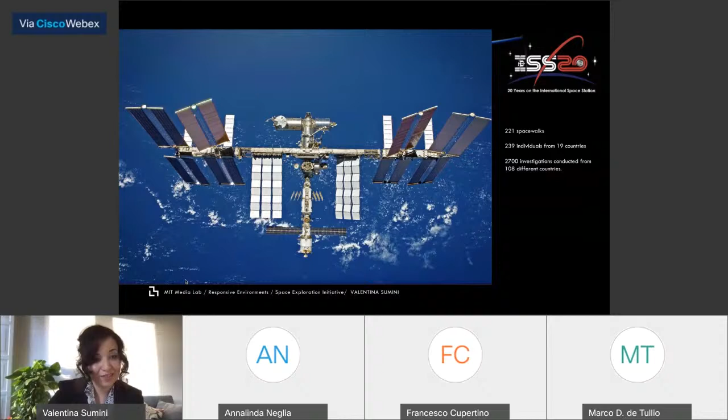When trying to give a new contribution to the space architecture world, we had to understand very carefully where we are coming from. We are coming from rigid and inflatable modules. We have extensive knowledge on how to design this sort of aluminum can-shaped component, which the International Space Station is made of.

We also had extensive research on all the inflatable structures that both NASA with the TransHab and Bigelow Aerospace are developing for outer space. The combination of the two creates a new possibility in how we can really define and experiment in this new type of architecture.

What I think is interesting about inflatables — for example, inflatable solutions that can be pressurized in situ, when they are really in orbit or on the Moon or Mars — is the idea that they can be compacted during the launch phase, and then deployed and pressurized once there.

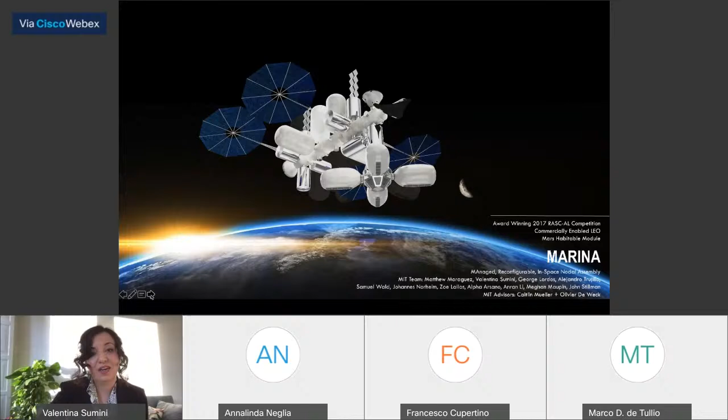With this concept, we designed our first project back in 2017. This was meant to be a space hotel designed using the existing modules of the International Space Station, with new modules added for allowing space tourists to go there.

What you can see here, with this sort of flower of inflatable modules, is the space hotel. It can host up to six tourists. What we tried to realize is inserting these hotel modules around the Cupola module of the International Space Station.

The idea was allowing the tourists to see Earth from above and creating that awareness experience I was talking about — the overview effect. This was one of the first projects that tried to combine the knowledge of both rigid and inflatable modules, using the library of modules already available at the time, in 2017.

But then we moved forward, trying to understand what could be an innovative solution for designing infrastructure on the Moon.

And looking at the lunar environment was something we wanted to take into account, or the use of in situ resources. There are several interesting aspects in using, for example, the lunar regolith for 3D printing to generate infrastructure components, but also another interesting aspect is ice.

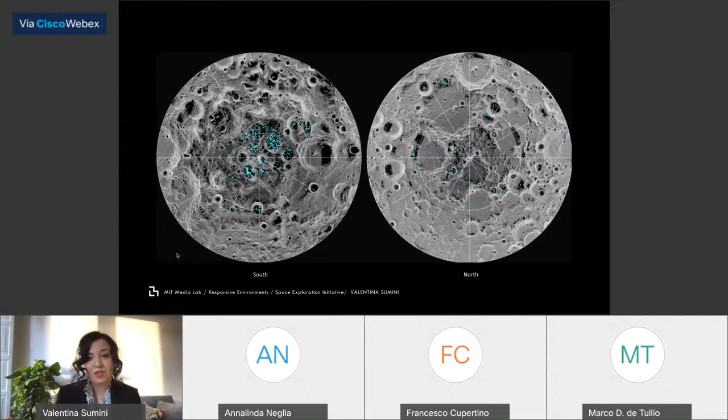We wanted to locate the habitat in a place plenty of ice, in this case the South Pole of the Moon. What you can see here are the two maps of the North Pole and South Pole. In the South Pole, we decided to locate the habitat in the Shackleton crater, mainly because in its shadow area we can find a source of ice that can be useful if you want to enable humans to live in this environment.

Another interesting feature of the Shackleton crater is that along the rim we can have the peak of eternal light, where we can use sustainable energy sources like solar panels to sustain our infrastructure. Something interesting for us, as architects, is understanding these constraints, because here on Earth we design for specific environments and specific constraints that we define every time we start a new project.

In the lunar environment it's very harsh and hostile because we don't have any atmosphere, we're not protected against cosmic radiation or micrometeorite impacts, and we have extreme thermal variation. We really need to look for a safe place to land and build a safe infrastructure.

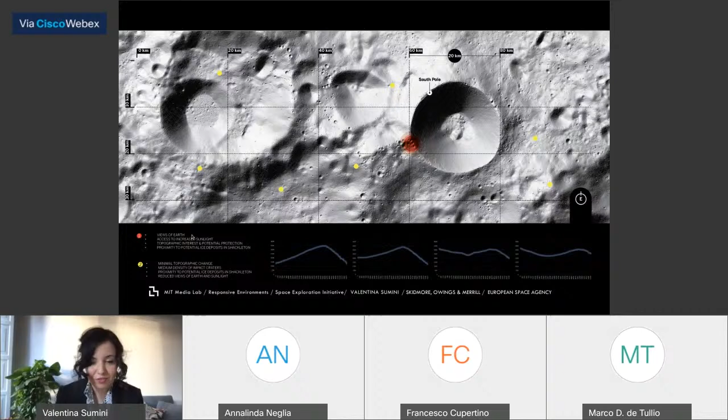In order to achieve that goal, we tried to understand the possibilities we had. One would be designing and building all the modules here on Earth and shipping them to the Moon. This could be composed of rigid modules like the International Space Station, inflatable structures, or a combination of the two, a class 2 modular system with both rigid and inflatable elements. Or it could be a class 3 in situ robotics approach.

We had a combination of inflatable structures hybridized with regolith and other in situ material to integrate the habitat. We had to understand which type of architecture worked best, so I performed a multi-objective optimization to find, on the Pareto front, a good solution considering rigid modules, inflatable modules, or in situ resources. We found that using inflatable elements protected with a shield of lunar regolith would be the best solution for generating a bigger volume while minimizing launch mass and maximizing the use of in situ resources.

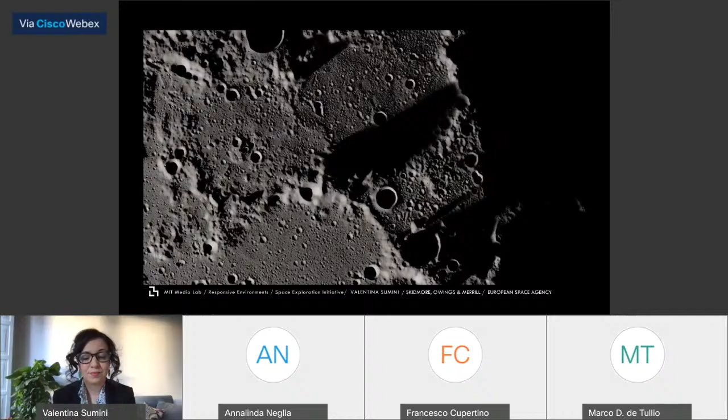We choose to go to the Moon in this decade and do the other things, not because they are easy, but because they are hard. Because that goal will serve to organize and measure the best of our energies and skills, because that challenge is one that we're willing to accept, one we are unwilling to postpone.

So here we are, we just landed on the Moon Village on the Moon. As I said before, this project was developed in partnership with SOM and ESA, and within MIT and ESA we had two astronauts on board. At MIT, we had Jeffrey Hoffman, and at ESA, Claudie Haigneré, a French astronaut. Together with them, we came up with this solution, which is very intriguing because we generated a new shape to fulfill all the needs and requirements for this closed loop system deployed in each module.

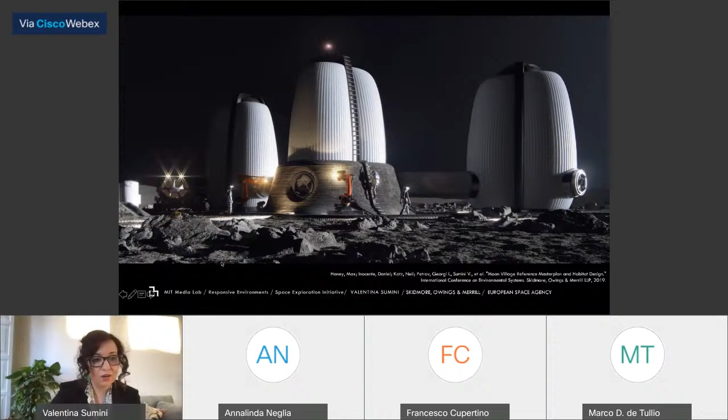This 3D printed lunar regolith allows us to have shielding against cosmic radiation and micrometeorite impact, and it will also cover the airlock of the infrastructure.

We designed a different type of infrastructural solution for the modules that will require some manufacturing processes, both in situ utilization processes, and for them we designed different modules because they will require a different pressurization level. While we are trying to achieve habitation modules that can ideally go up to 1 atmosphere or 0.8 atmosphere, the other ones can be less pressurized, and therefore can be optimized in terms of shape through different architectural solutions.

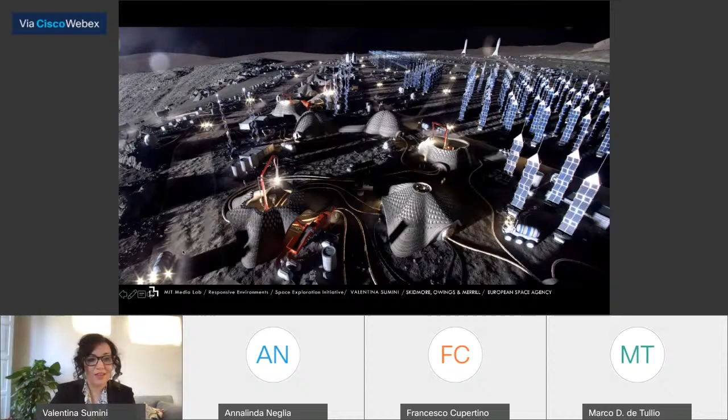Is it true that when you design for this type of environment where you don't have an atmosphere outside, the main load condition is the internal pressurization, and this also drives the design, the material selection, and all these little details. For example, the connection between the membrane element and the rigid composite frame.

Regarding the design of the interior, we had a lot of anthropometric consideration. We had as manual the NASA Human Integration Design Handbook that helped us figure out the different configurations of a human in reduced gravity, because on the moon we have 1/6 of gravity.

And of course, the way we are going to perceive the space, the way we're going to behave within this space, is going to be totally different.

I actually tried the lunar gravity through a parabolic flight where we tested different reduced gravity conditions. I tried both the Martian one and the lunar one, and the lunar one is really intriguing because you can jump extremely high without even realizing that you are jumping so high. So the way we design the interiors is also driven by aspects related to mobility and of course ergonomics of space due to this reduced gravity.

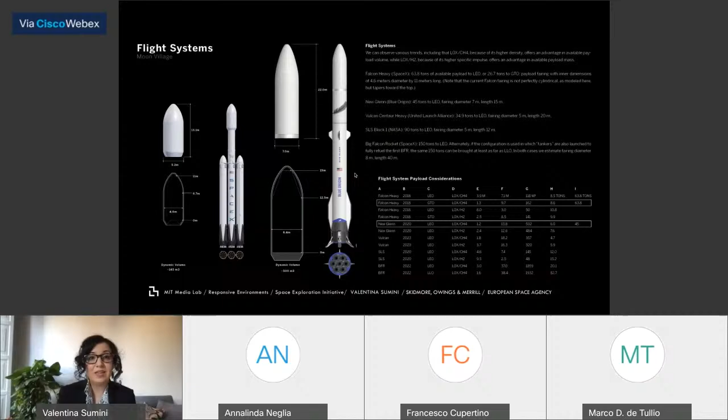And our project could be inserted inside the Falcon Heavy and the New Glenn. So considering these two aspects, we made a nice rendering of how it's going to look like. The picture in the center shows the module folded to fit within the rocket payload fairing system, and the other one once it's pressurized, so you can see the volumetric difference between the two configurations.

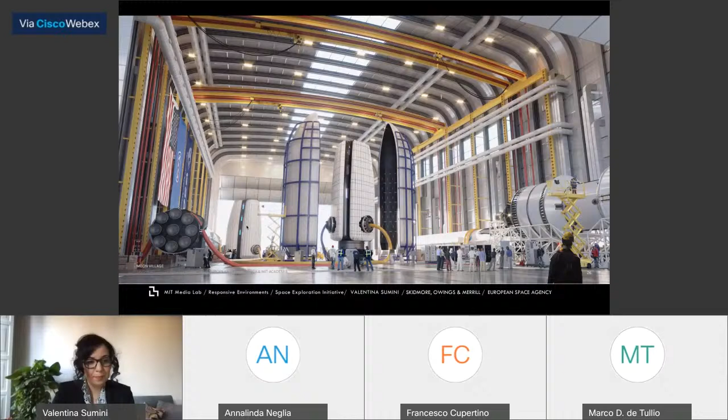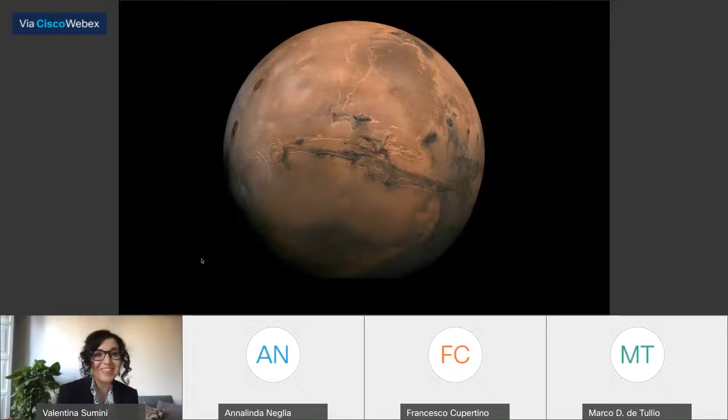And then Mars. Related to Mars, the project I wanted to mention today is how we're going to generate food on Mars. It's a greenhouse project we developed together with Alta Scuola Politecnica for this award-winning NASA challenge. It's an intriguing project because it incorporates the knowledge NASA gained in the past year with the Ice Dome project, the idea of a habitat for astronauts living on Mars for 600 days.

Because of orbital mechanics, the travel is longer, so we have to spend more time on the planet than in the case of the Moon. We are designing a habitat for Mars for 600 days of permanence according to this competition.

The project takes advantage of previous NASA knowledge of the Mars Ice Dome, which you can see here on the left, where you have the housing part and the laboratory housing for the astronauts. Then we had to design a greenhouse system that's going to sustain the astronauts 100% in terms of nutrients.

We made a calculation for an astronaut per day, considering 3,000 kilocalories. Our greenhouse system is based on a hydroponic system, just to allow us to grow enough plants to sustain 4 astronauts for 600 days.

The project takes advantage of the reduced gravity we're going to find on Mars. The idea is having a germination area at the bottom, and when the plants are ready, they're lifted up to the top of the spiral. The trays are placed at the top and flow down thanks to reduced gravity while they grow, so you always have a new cycle of plants coming out of this system.

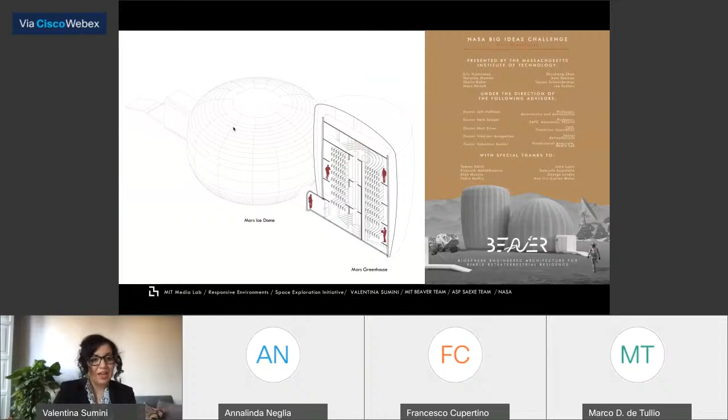Even in this case, we are considering the concept of operation requiring autonomous deployment. After launch, the greenhouse will take 6 months to arrive on Mars, then it will autonomously deploy, meaning the pressurization will take place, the membrane will deploy, all the telescopic elements like the column and beam will deploy, and the spiral that was compacted during launch will be deployed as well.

Then we're going to have extensive work extracting ice from the surface of Mars, because as I said, this project arose from the knowledge of the Mars Ice Dome, and I wanted the same sort of strategy. We wanted a double layer membrane insulated through a gas layer for thermal insulation, with cosmic radiation protection done through ice. Extracting the ice and filling the volume required for this shielding against cosmic radiation takes almost 2 years, so the greenhouse system needs to be deployed 2 years before the astronauts' arrival.

And what I want to show here is a video of the project.

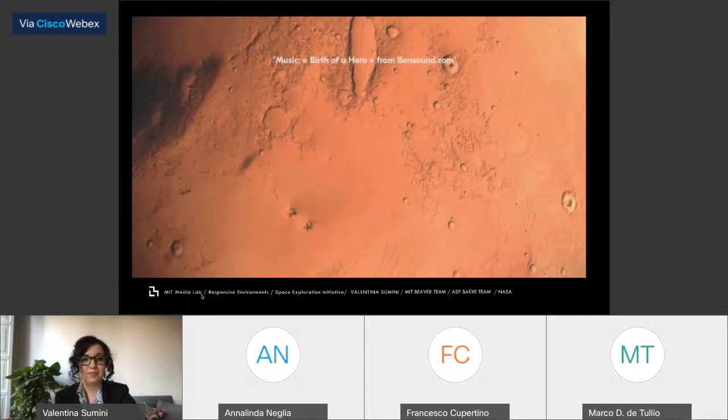As you've probably noticed, many portions of the habitat are dedicated to reconnectedness with nature. We wanted to develop this greenhouse project not only considering the food production aspect, but to generate a space where humans and astronauts on this long-term mission could really dedicate and spend time dealing with plants. This is absolutely important for a long-term mission because we're going to miss nature, we're going to miss planet Earth, and regenerating this connection with nature is one of the most important aspects.

One of the interesting elements we considered is the water reservoir inserted at the top of the habitat. This water reservoir helps the hydroponics, as it's placed at the top to allow hydration of the hydroponic system and activate the hydroponic greenhouse system along the spiral.

We decided to generate a sort of waterfall with tiny little drops, like a rainy waterfall, just to recreate the sound of rain, the sound of water falling down that we have here on Earth, for mental wellness. When designing for long-term missions, this aspect is very important, so we try to generate solutions that also take into account this extremely important component.

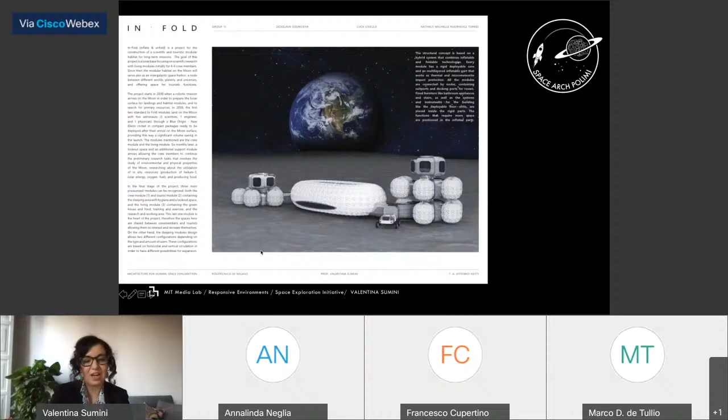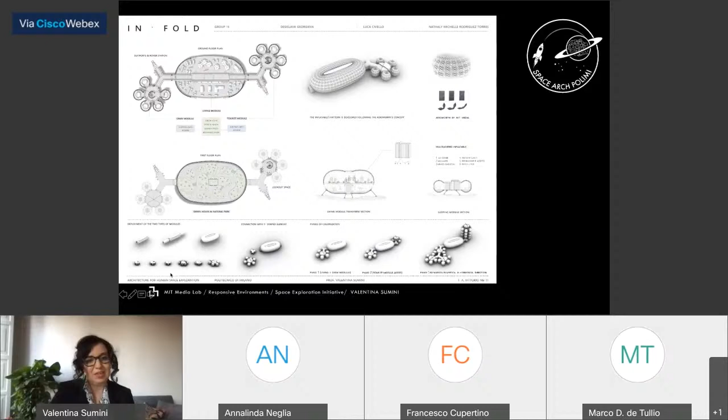I wanted to show a brief overview of some of the final posters we had. For example, we had this project, Infold, that used inflatable technology together with an origami structure to define habitats on the lunar surface within a modular system, with different solutions for how we could aggregate and populate an entire ecosystem using the same inflatable origami structure.

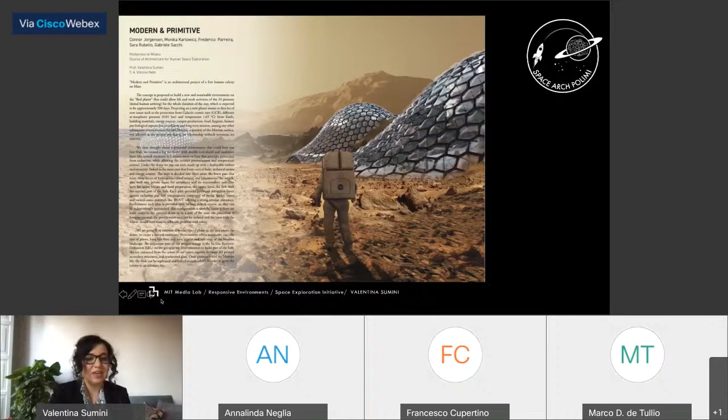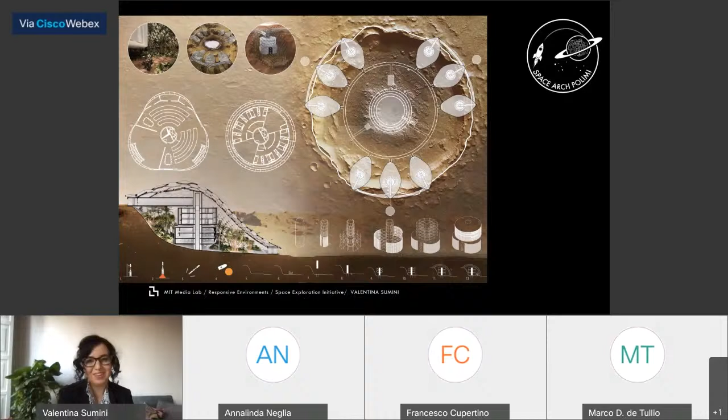We had a solution for Mars instead, about how we're going to populate a crater on Mars by reusing the landing module and building around it using in-situ resources, creating an entire ecosystem including a greenhouse and plants. This was a fascinating project, considering also the closed-loop system and reusing everything, so there's no waste at all during the mission to Mars.

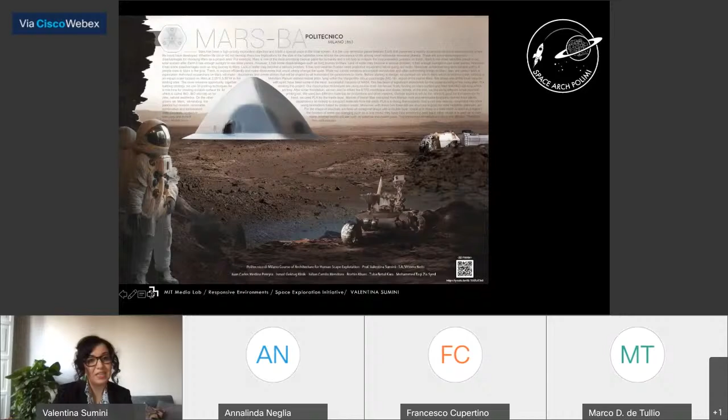This project, Mars Ba, was also really fascinating, taking inspiration from the work done by SEArch+ using 3D printed ice for designing houses on Mars, and developing it further by thinking about how many layers we could have, with different environments at different pressurization levels, and how we define this habitation model surrounded by a greenhouse system that uses hydroponics around the ice. They're going to be 3D printed, considered within a modular system.

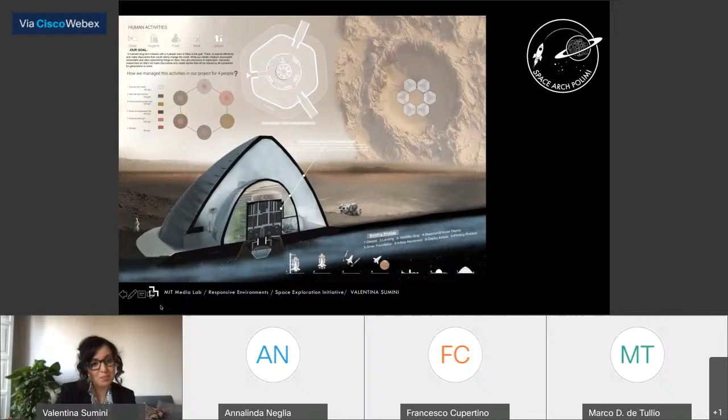Then there's the Ice Drop project, which is also an intriguing project, because instead of defining one unique solution for the envelope, they decided to differentiate the envelope according to the different functions within the habitat ecosystem. So we had a more translucent element, using water and polyethylene as a shielding strategy, and also some regolith domes devoted to the areas where astronauts will spend most of their time.

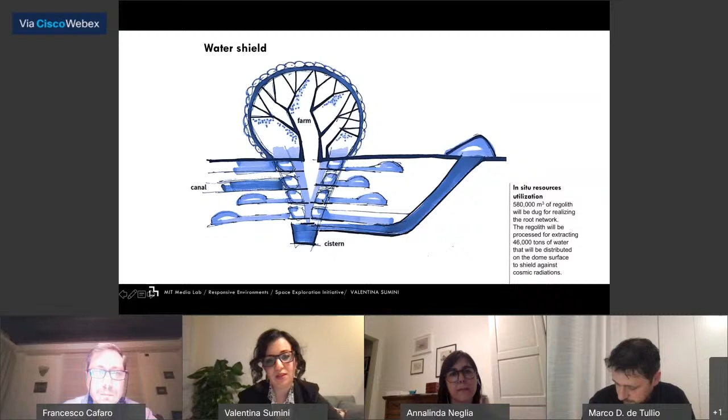For this project, the water was not located at the top. Instead, we chose to create a cistern at the bottom, extracting the ice and keeping it down, then vehiculating it along the branches and the outer shell. All the configuration was really optimizing the branch structure.

This involved analysis of the root system, calculating the amount of water required to cover the branch, and automatically recalculating and optimizing the branch using a force density method, with the idea of generating a frame for the tessellation to cover with polyethylene water and lead glass stratigraphy.

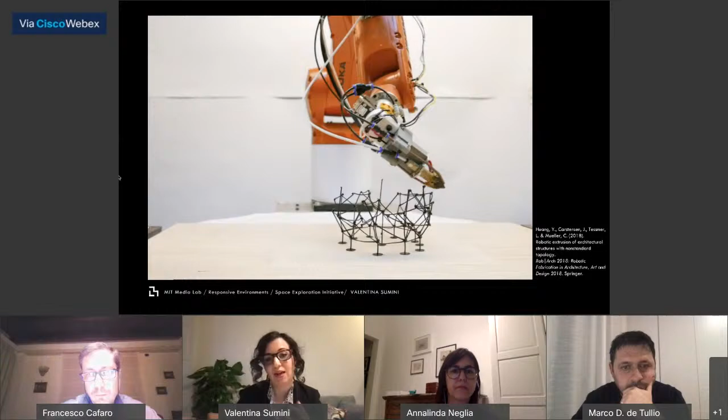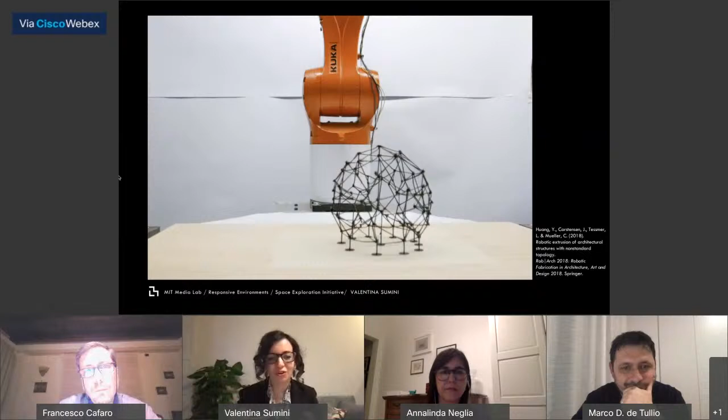We tried to recreate the sequence of structure without generating any support, like the Brunelleschi dome in Florence, without any construction support system. The other aspect was that the effect of gravity was not really visible.

But thanks to the University of Bologna, we performed a Monte Carlo simulation related to the neutron dose at different levels of the habitat.

This was very intriguing because we understood how the neutron dose varies according to the shape and topology of the surfaces, and how the branch structure was useful to protect certain areas of the architectural space instead of others.

This would lead us to redefine the interiors, driven by this data.

This was also one of the elements we considered for the Moon Village project. Even using a different shielding strategy, we decided to have a super safe area at the bottom and leave the more exposed area for activities and functions not requiring 24/7 presence from the astronauts. That's the strategy we applied.

I don't know if I answered your question properly. Okay, yes, thank you very much.